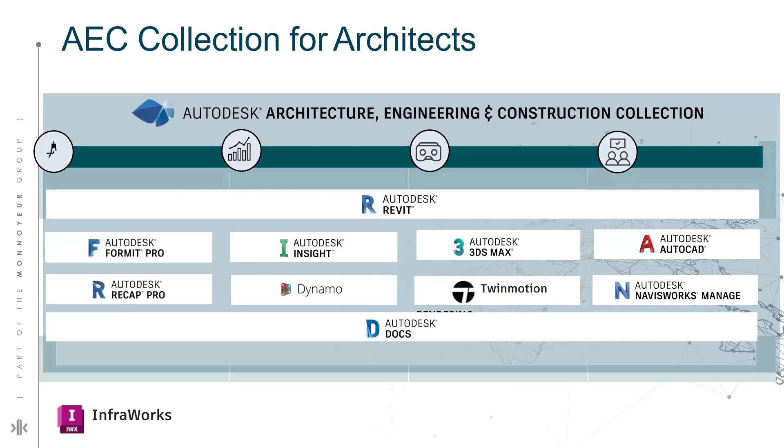Similarly, in the bundle for architects, we have Autodesk ReCap Pro, which is particularly used for point cloud data. And for more automation, to reduce errors and efforts, we can go for Dynamo scripting, which works on visual programming tool based activities. So here we can reduce our time and effort with fewer repetitive tasks.

Similarly, with the help of Autodesk 3ds Max and Twinmotion, we can go for visualization. Autodesk Revit is also directly interconnected with Twinmotion. We can take that model directly and visualize our entire project from the conceptual design phase to the end of its outcome. And a common platform which everyone is still working on, the most used part, is 2D drafting, where a person is not going for building information modeling but just needs some drafting tools. So AutoCAD is the best solution we have in our package.

Finally, with Autodesk Navisworks Manage, we have clash detection, where we can see the different clashes within our models across different disciplines, and we can link those models directly into the Revit interface and resolve those issues at the same time.

Coming to the other part, these are particularly the solutions used by architects in the bundle, but when we come to infrastructure, we have InfraWorks and Civil 3D. InfraWorks is used basically for conceptual design or the land development part, to capture the land. If someone doesn't have a way to start with a conceptual design, he can go with the InfraWorks model capture, land capture, bring that land capture model to Revit, and move on to the detailed design process within Revit.

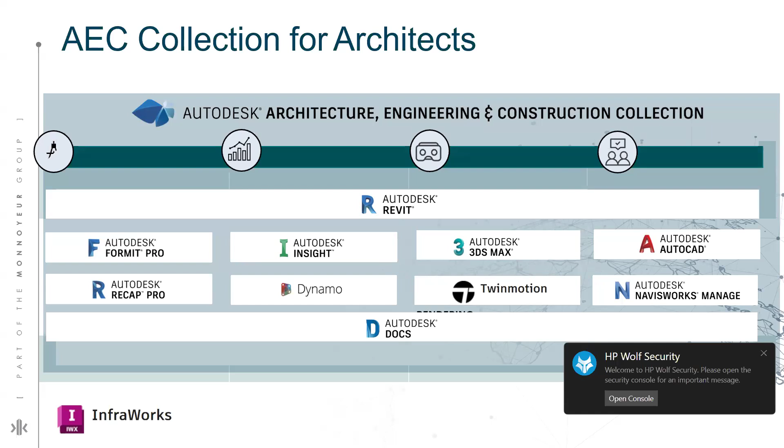So coming back to the workflow process, we will initiate with a live demo showing how InfraWorks is interconnected with Autodesk, making our work less repetitive in nature and minimizing our errors at the same time. Similarly, we will be looking at the other solution, which is known as Forma.

So coming back to InfraWorks, it is basically a tool for land capturing. When we start the entire design process from the conceptual design phase, we can pick InfraWorks as a tool to bring site capturing with its amenities onto our Revit model, so we can give certain desired inputs required onto the drawing in Revit. So it's used for the site development part.

Similarly, if I come to Forma, it captures a certain area within the entire model that you need, and then you can take those models and develop basic generic forms out of it with certain area metrics. For FARs, you can have the built ground coverage, and as soon as you've modeled all those entities directly onto Forma, you can bring it onto Autodesk Revit again for detailed designing. So whatever we have modeled onto Forma will take those elements onto Revit as a category-wise solution, coming under separate categories.

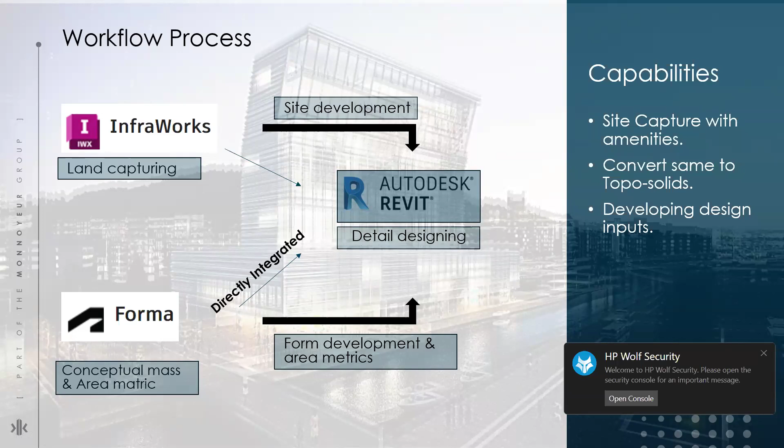So now I would be moving on to show with a live demo how these two tools, InfraWorks and Autodesk Revit, are interconnected. So here we begin with a live demo now.

So you can see here we are in the InfraWorks domain. And for a site to be captured, we have to move on to a particular option, which is model builder. So once we move on to model builder, it will give us a GIS location map.

Where we can trace our own site accordingly with the amenities we require. It covers an area of around 200 square kilometers to capture at a time, and you cannot have multiple composite links to it.

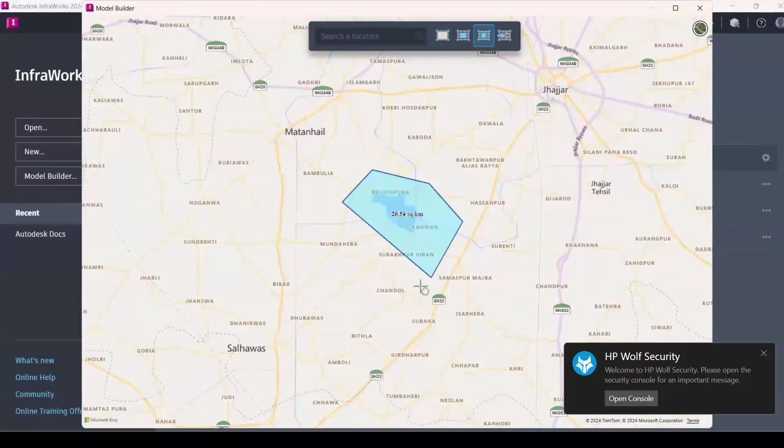And if you are moving with Google Earth Pro, you can use the option to import a polygon. Now I'm going for the general polygon option and I will capture a particular site. I will name that model, and I will select a particular coordinate system within that particular location.

So once this is done, our entire file will appear onto the workspace. Now you can see we have a test03 file, which we have named, and we can open this file directly. So I'm opening it onto the local desktop network.

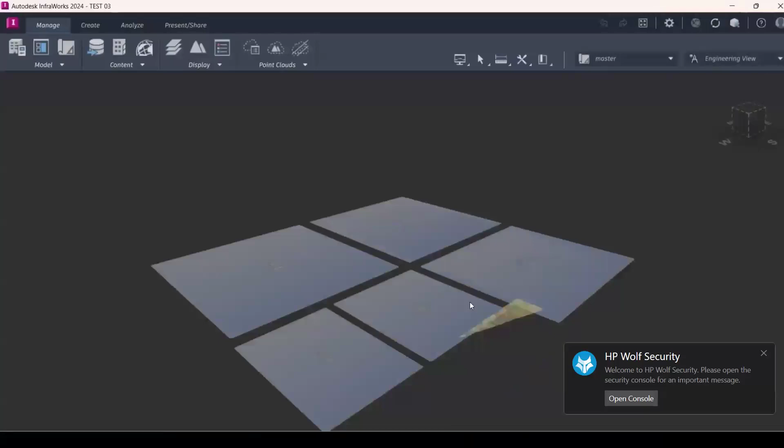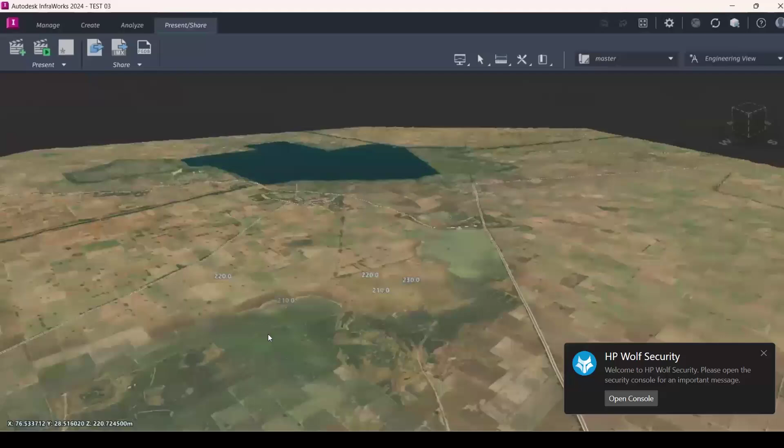So now you can see we have our site captured with a number of amenities within. We have to see what integrated details it gives, like contours and other amenities around, and then export it in a particular format. I would go for the .fbx format to take this model onto FormIt Pro for the CAD development file format.

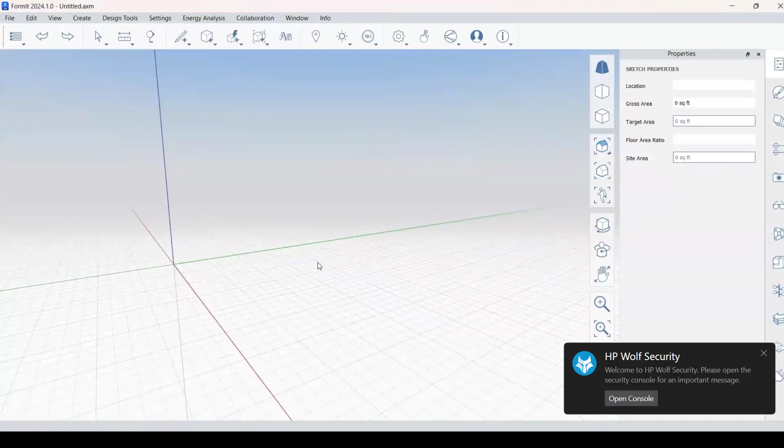So I am onto my FormIt interface and I'm just importing the files which I have saved. Now this is particularly a CAD sort of file format, and I can link this CAD format directly onto Revit for TopoSolids generation.

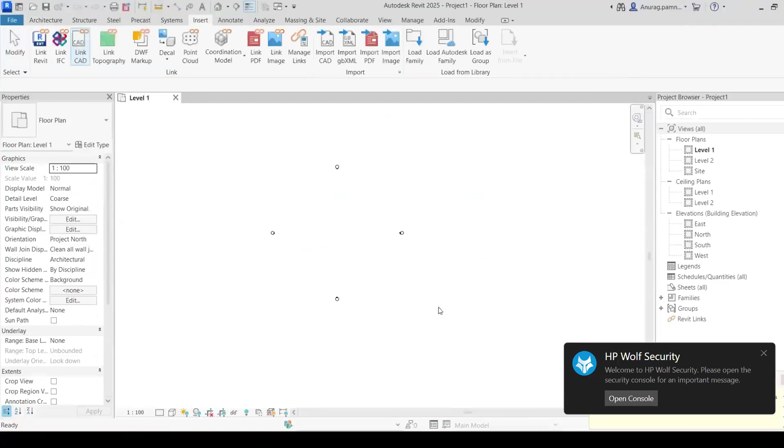So I have linked the CAD file. I will choose the particular file and open it. Now you can see we have a CAD model, and we can convert this model onto TopoSolids using the import category option. Once this is generated, we can go with the detailed design options, where to cut, where to fill, and develop our building pads accordingly.

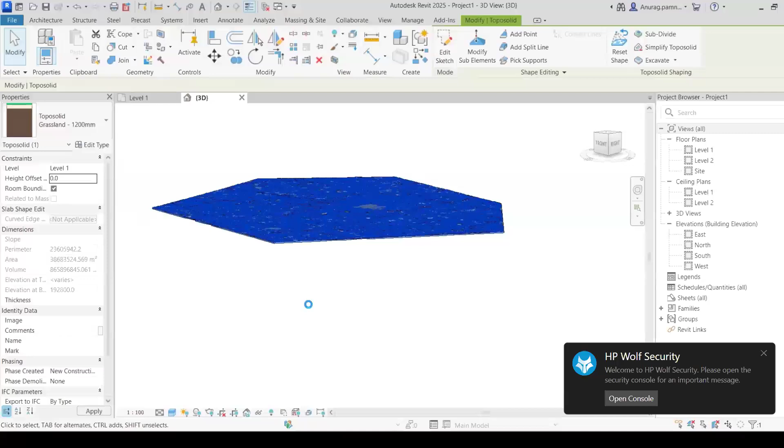So this is how our tools are being integrated. Now I would like to showcase the second part of it, where we will be moving on from Forma model to the Revit part of it.

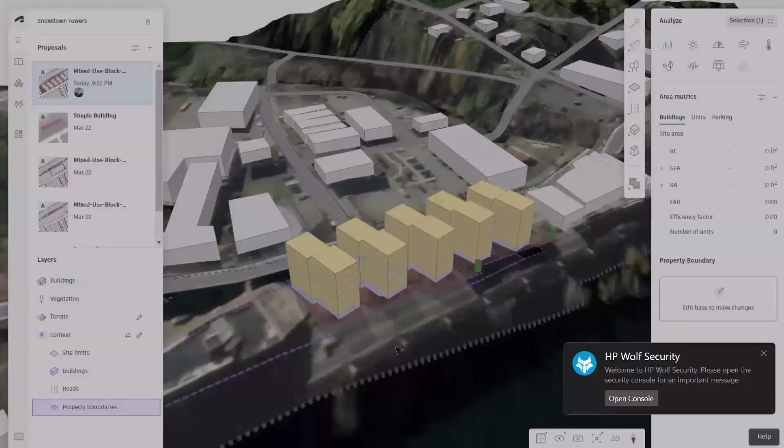So we have a beta plugin add-in which has been directly installed onto Revit, and we can integrate both of these solutions together. Now you can see on the right-hand side we have properties, and we can develop those property-based metrics of the blocks. It basically supports the initial rectangular formats.

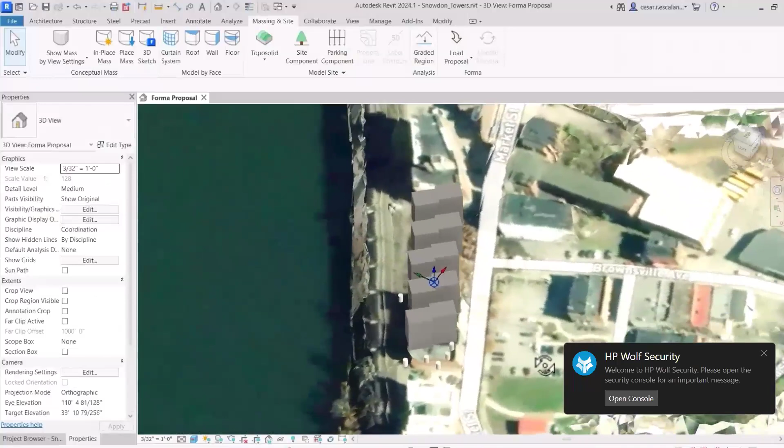And then we can analyze it at a conceptual level. What is the amount of daylight we are receiving? And what else - some other sort of analysis like wind, noise, and other forms of analysis can be done in an integrated way.

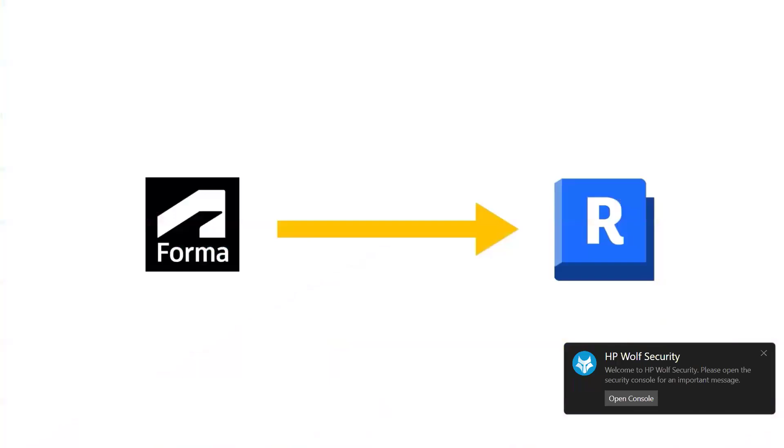So it's a multiple-time format through which we can take the Forma file to Revit and back from Revit to Forma again. So we can do these options multiple times - we are catering the changes onto our models.

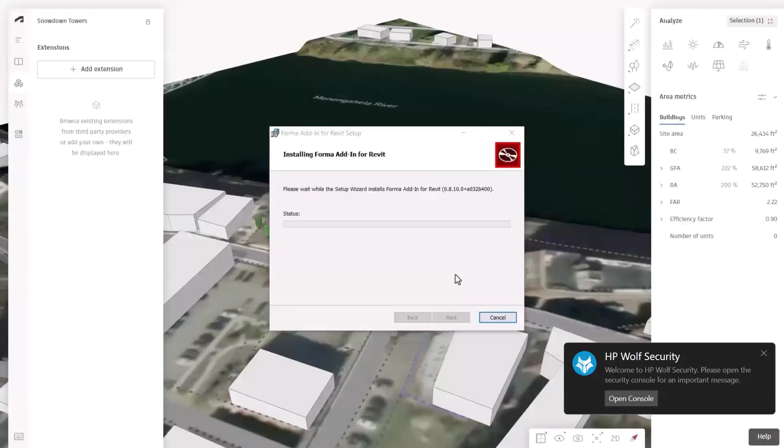Once done, these add-ins can be downloaded from the App Store and you can install it directly. You can duplicate the entire model to work with a number of options within, and send it directly onto Revit. Once it's been sent to the Revit part, I will just open that directly onto the Revit model and load the entire model.

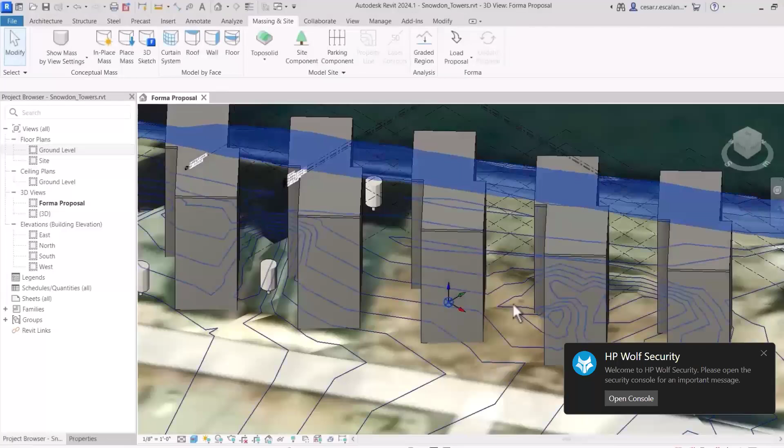So you can see both of the interfaces have been linked, with the category-wise solution. So whatsoever we have elemented onto Forma has been converted into a particular category over here, and we can link it with a particular location to get a correct analysis within both of the interfaces to work with.

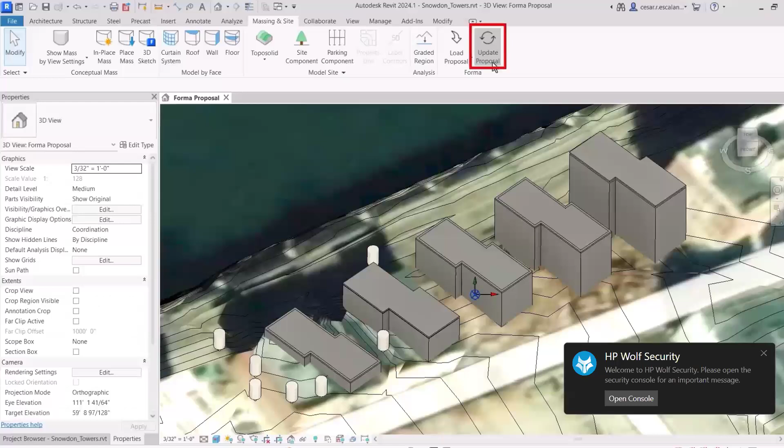And once done, we can update the entire process back from Revit to Forma. So this is how these tools are actually directly linked - we don't have to make the entire changes back again and again onto a certain platform. We just need to modify it at one end and we can get the same output result at the other end as well.

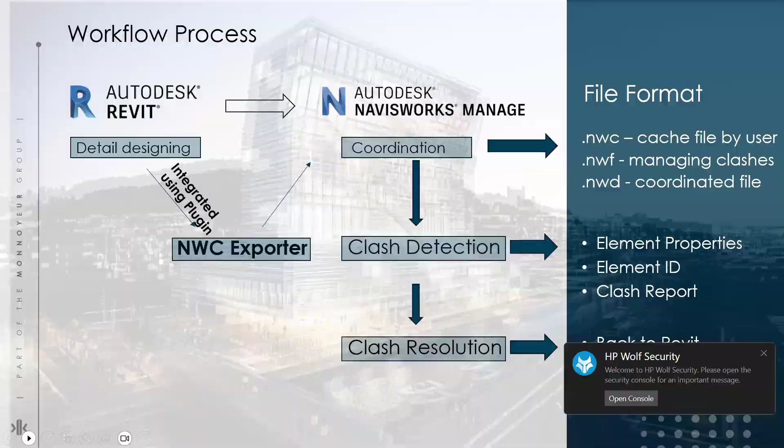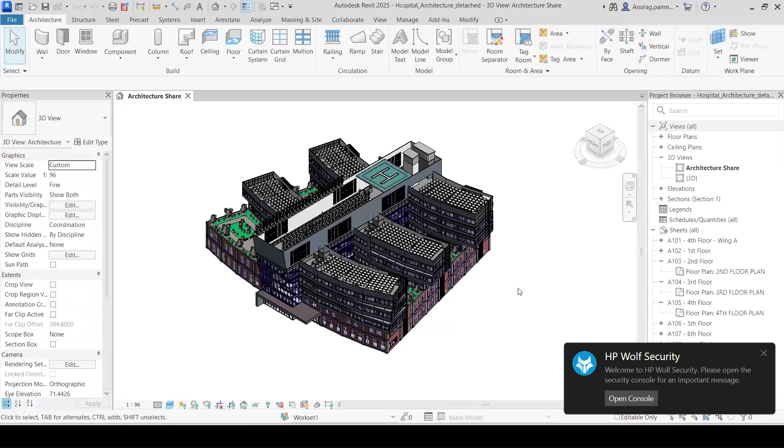Once we have our entire detailed Revit model with various other disciplines together, we have to export it using the NWC exporter directly. Under the Add-Ins tab, you can find the exporter and export these files. Certain options need to be checked before exporting the files.

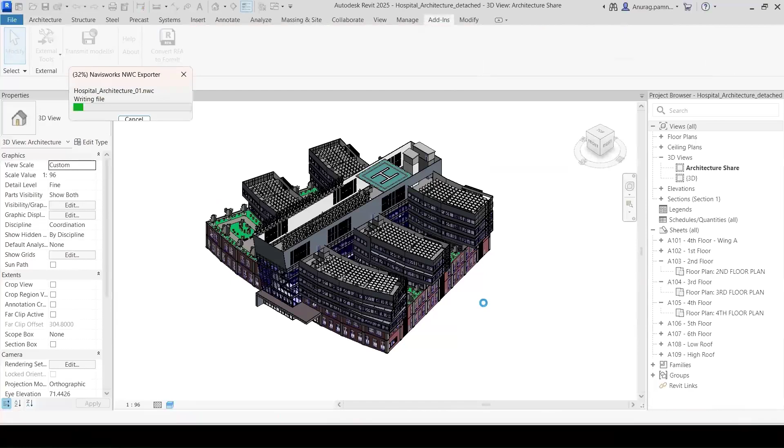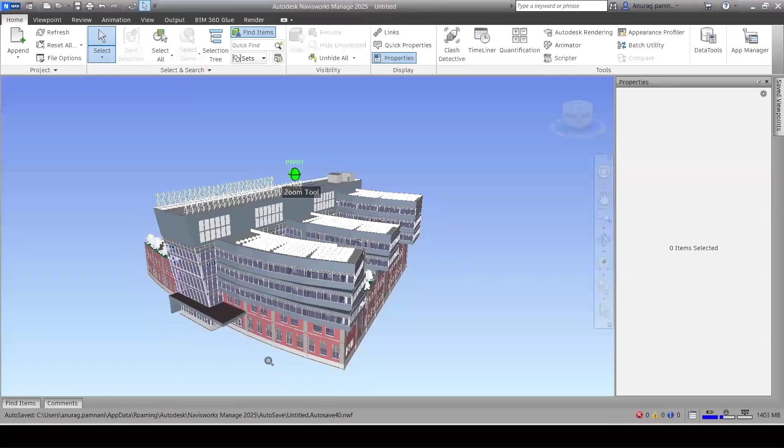Similarly, we will go for the structural model as well, exported the same way. Once they have been exported, the most important part is that they should share the same coordinate system. Now within the Navisworks platform, I can integrate those two models directly so they superimpose with each other, allowing us to go for the clash detection part where resolutions are there within the models.

We'll add the test. Suppose this is architectural versus structural test. We'll select both models and run the test. Now you can see the file has 5042 clashes.

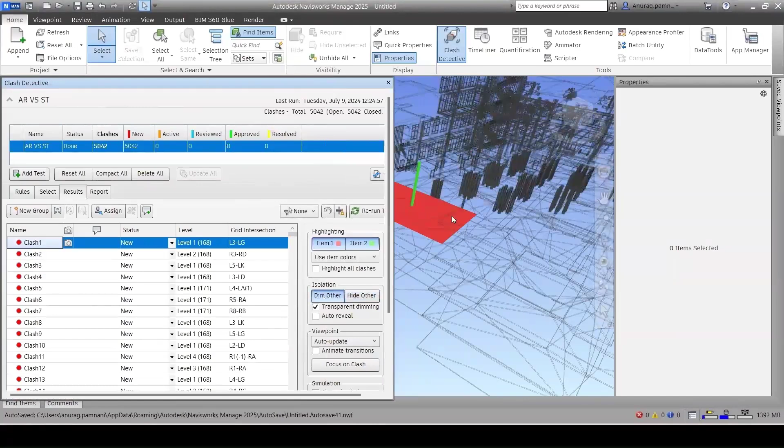This is the particular file which I will save as .nwf format. I have imported or appended the NWC files, and on the right hand side you can see the properties of elements and element IDs.

Now I'm saving this particular file as 'architecture' or a 'Noida01' name onto my desktop as an NWF file. Once users are using it at their end, they have to make resolutions in Revit and again export those files into NWC format, then append it within this NWF file format.

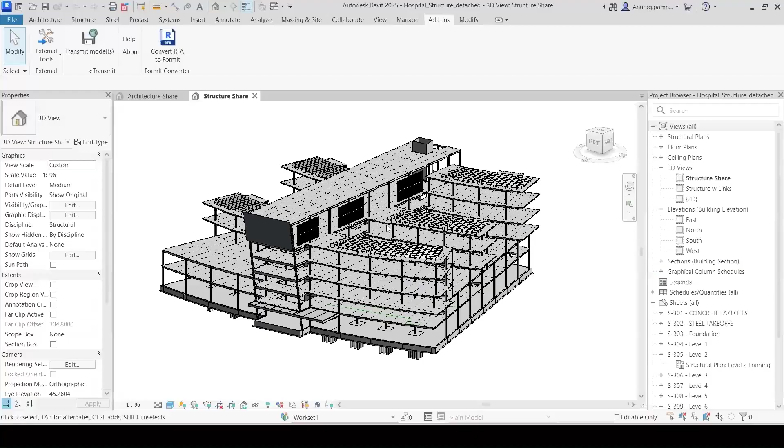So you can check down the amount of results, this is the ID which we have placed onto Revit, and now we have to resolve this accordingly. By applying the section boxes, it takes you directly onto the element which has a clash in between. With the NWF file, you can see where the clashes are and how many have been resolved.

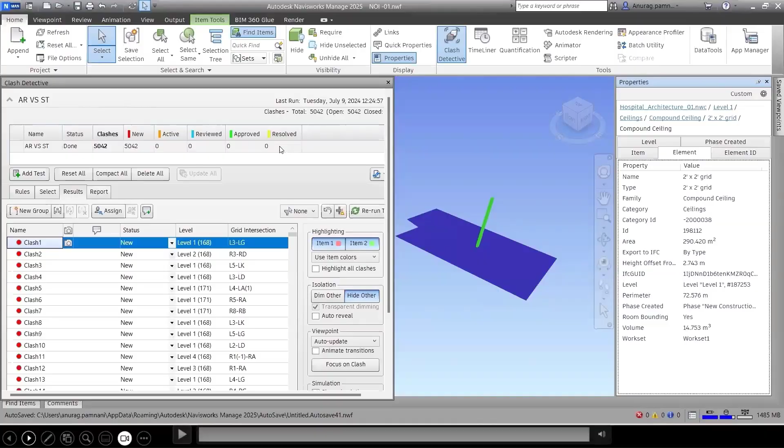Over to you, Nishant.

Thank you, Anurag. So again, quiz time. To integrate a Revit model with Navisworks, one would require: option A, beta exporter; option B, Navisworks exporter; option C, Revit interoperability tool plugin; option D, none of the above.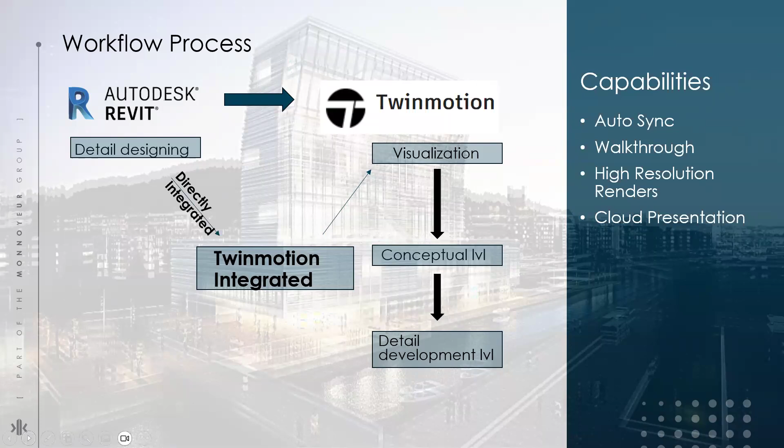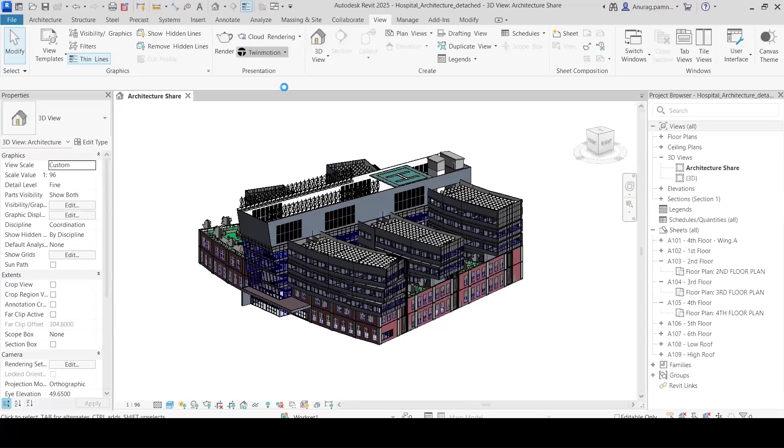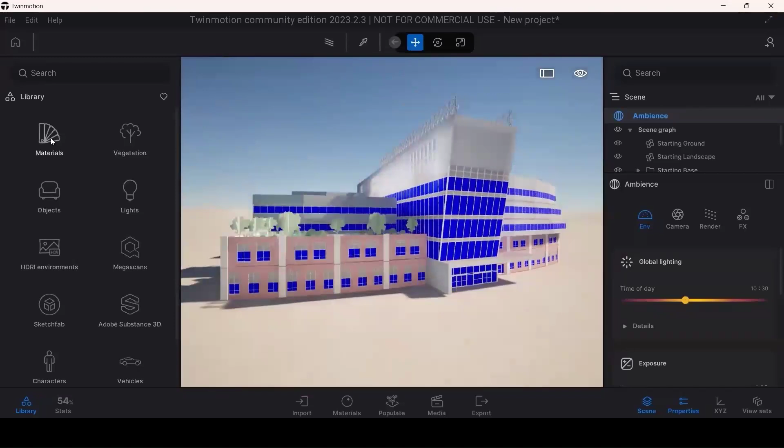So we have this detailed model, and under the views tab, you can see we have a Twinmotion option where we can interlink this model directly, and it establishes a link between both of them. So now we have a model in Twinmotion, and we can speed up the entire process. On the left hand side, we have material palettes. So we just need to drag and drop the materials onto the surface. It is capable of dividing material-wise properties into categories. Now you can see the ambience has been changed with the sun. You can make further alterations with property enhancements that you can visualize accordingly.

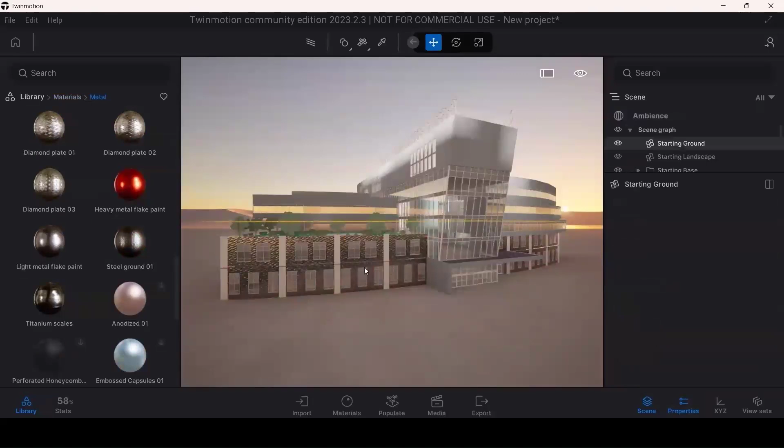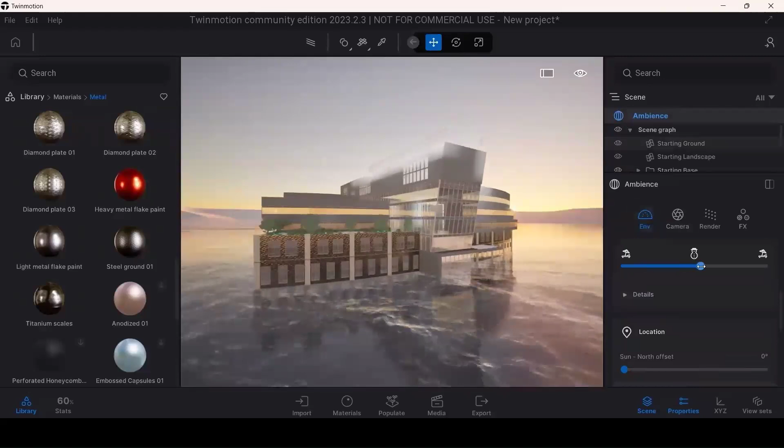So for the development part, I'm just taking the ocean site. Suppose the site is at the ocean, we are going to make it a little interactive. So you can do multiple options, do hit and trial. That depends on the sort of visualization you need within the software and tools. And you can change the weather positions, and you can even set your own location. So weather properties can be taken accordingly, and you can analyze what effect the sun has on the building.

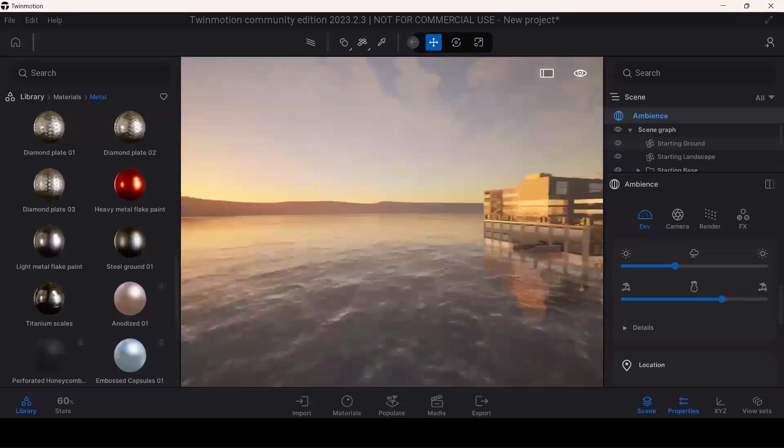Moving back to Revit. I'm going to make certain changes with the help of a stair so that it can be incorporated within our Twinmotion model as well. So now you can see I have modified my Revit model with the addition of a staircase. And similarly, this way you can walk through around the buildings. You can develop those cameras accordingly, and you can give a quick look at how walkthroughs will be.

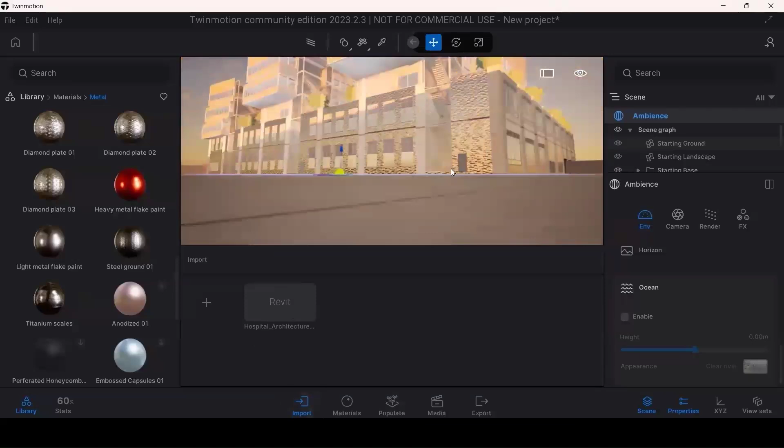So this is how we can go for the walkthroughs. We can develop those camera angles and can take the render sections accordingly. Similarly, I'm copying down this element again onto the front end side to see the enhanced results. So now you can see it has been integrated onto my Revit model as well.

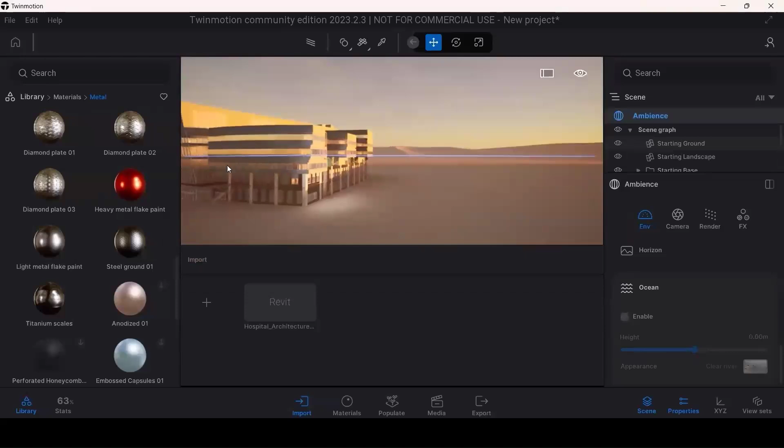So now you can see by the auto sync option, we have minimized the level of work we have to do by taking those options back in the form of .fbx or obj, making changes. And now I have set it in camera, and I will be going for the render option. So you can get 2K and 4K resolution images within 1 to 2 seconds of time. So this is how the entire thing works with these two capabilities.

Coming back to the workflow process where we were dealing with the integration sort of thing. So, we have brought the model from its form development or a conceptual level, from the land development to detailed designing in Revit. Then from the detailed designing portion or the conceptual level portion, we are moving it for the visualization purpose onto Twinmotion.

Similarly, with detailed designing with various disciplines that are involved within our project, we are taking them onto the Navisworks Manage platform for the coordination purposes. And overall, in order to manage all these three or four domains together within a network, we are opting for the cloud solutions.

So this acts as a common data environment source for us, where we can generate the request for information capabilities, where we can create the issues, where we can create the markups, where we can store a single source of file. So eventually, if you store those files with the same name, it will come with different versions, and you can compare between those versions as well. So if I have a file of version v1 and I have uploaded the same file back again with the same name, it will get a different version.

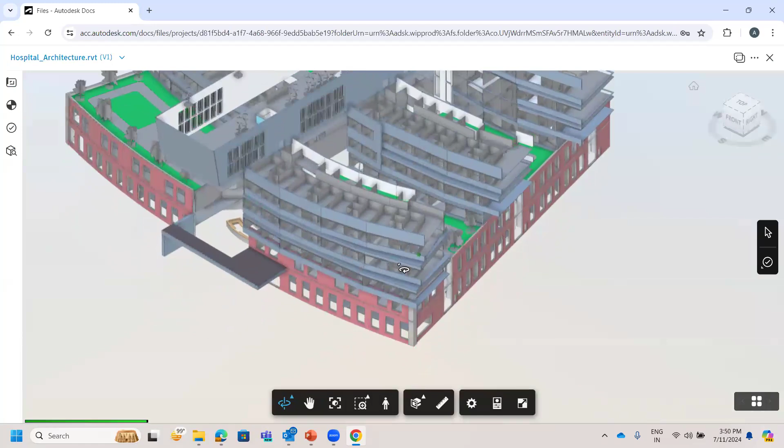So now you can see I have a model within the cloud network, this architectural model in particular. So if there is a certain issue within it, suppose this overhang I feel is quite large, right? So I can mark it as an issue. Suppose this becomes a design issue, I can choose that option. I can click on the design part or the particular area where that issue is associated.

I can give it a title. I can give it a status, whether this is open or not. Now I can go for the description. Suppose overhang width or depth, whatever the description is, you can apply that. And whom am I going to assign it to?

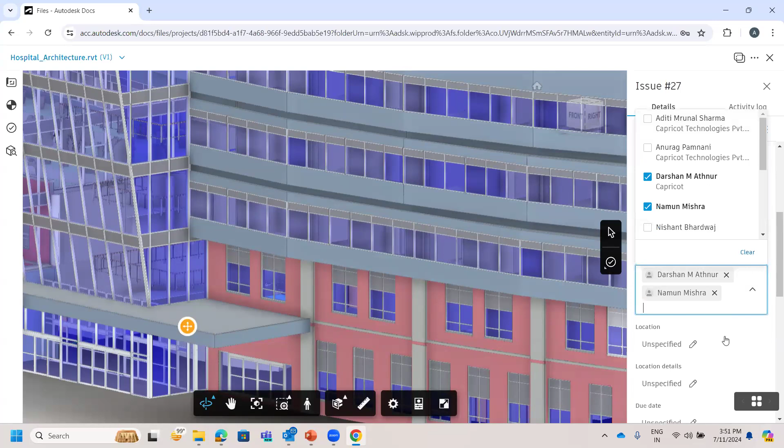So among the members involved in a project, depending on disciplines and access to the folders, you can assign those particular issues to a particular person as well. So I have assigned it to Darshan, and I can add multiple people who are associated with it as watchers. You can fill in the location, start and due date. You can prefix how many days you are going to allot to a person.

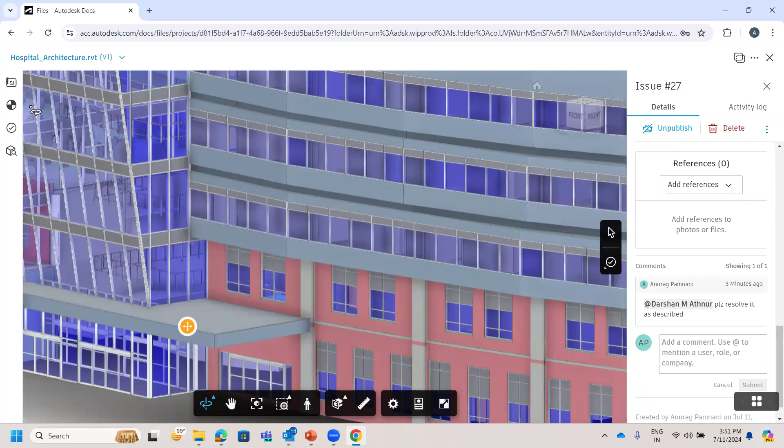So just 1 day to resolve this issue at his end, and you can tag a person directly: at Darshan, please resolve it. Solve it as described. So now you know who is looking after this particular issue, and I can submit or create that issue. Once this has been done, I can move back to my files domain and the issues.

And over here, you can see the latest issue that has been created with respect to Darshan. And this is the file the issue is in. So he can open this file directly at his end and see where the issue is, go back to Revit, resolve the issue, and upload that file again to this particular platform. So now you can see we have version comparison as well.

So this is how a single source of truth can be maintained with a common data environment. So this is it from my end, and we will begin the Q&A session now.